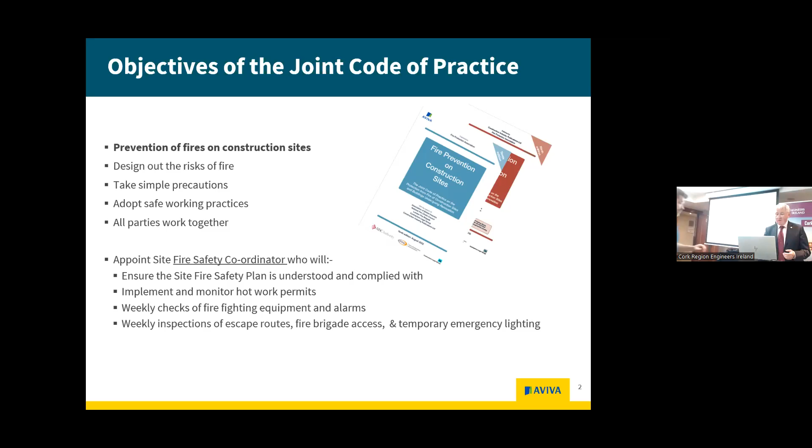Just a second, moving on. Let's see if I can do this right. Okay, straight away, I'm jumping now to section 5 of the joint code of practice. The first 4 sections are really just objectives and compliance and dealing with definitions - kind of the irrelevant stuff. So really, you're starting straight away into the meat of the code of practice.

The first part, we're looking at the requirement to work with project supervisors for the design stage and the construction stage, having a coordinator there. Look at the original plans and make sure that you design out the problems. You're going to be doing that on construction sites - looking at scheduling, looking at lifts, and bringing in machinery as a site is going on.

So really, it's important to get in early, try and eliminate the use of combustible materials. Basically, at the start, use non-combustible, non-flammable materials - trying to use rock wool or other materials instead of maybe polystyrene, or reducing your overall combustible levels. Making sure that they're maybe manufactured elsewhere rather than doing hot works on site. You can maybe prefabricate some of these things off-site, and that would all help in your scheduling.

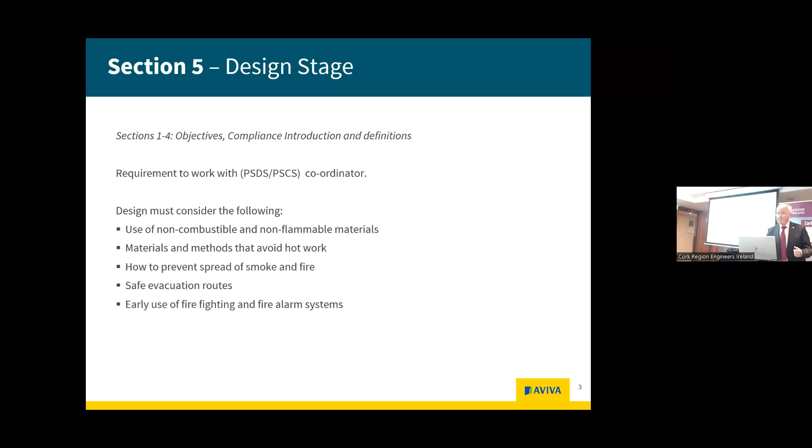So controlling the smoke will help reduce the spread of fire. And of course, having safe evacuation routes, getting people off site, that's a primary one. So maybe if you're up on a scaffold, is it only one access point or two access points? The code of practice actually looks at the regulations and says you should have two access points, so that if there's a fire starting where you are, you've got a second route to get out. Early use of firefighting and fire alarm systems is important - it's the first principles really of firefighting. If you've nothing to burn, and you get at it early, it makes it an awful lot easier.

Section 6, the construction phase. We're looking here at getting a good plan, and I can't emphasize enough, a good plan works with a drawing, laying out where on the site your skips are located, where the access routes for a fire brigade are, where cars are parked, where your set down is, where your lifts are, and things like that.

How frequent and where are the fire hydrants? Are you going to park over there, or are the fire hydrants going to be last or first? And groundworks - maybe you don't have water yet, so you might need a couple of tankers, just a tanker of water. During the summer, we probably need a tanker of water anyway to keep the dust down, but keep it full in the evening time in case there's a fire.

You won't always have access maybe to water during the early phases, but just having a tank of water would help. You might have a fire water tank, but you can get a fire water bladder, and that could have hydrant points there. It'll still hold maybe 50,000 litres of water, and it would help, especially if you have that conversation with the local fire officer - do they have to bring a fire tender, or a water tank, and where are their nearest resources.

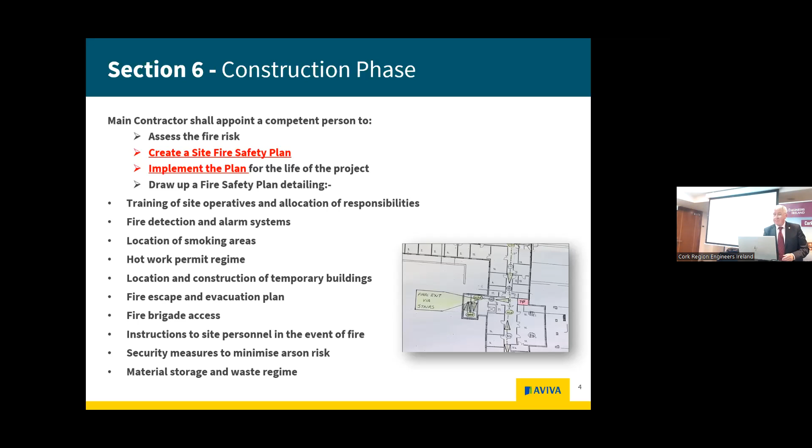Select a fire safety coordinator. You have a safety officer on site, hopefully, but does the safety officer have that skill set in doing hot works and management by walking about? Actually having a person responsible for safety, for fire, might be what the site needs.

So coordinating with them, there's the joint code of practice, now at revision 10, but revision 9 had a check sheet. Not an awful lot has changed, but it's a fantastic document to break down the day-to-day routines of going around the site, checking your fire extinguishers, are they serviced, checking fuel, where it's located, things like that.

But mostly it's hot works. You don't have to be a genius, just follow the hot works. That's where the majority of fires actually start.

Can we all think of really big fires in the last 10, 15 years, the ones that made the newspapers? Windsor Castle, that was construction work, they were doing renovations. And Beirut was a hot work permit issue that had massive consequences. So there's lots of things you have to look out for. Just follow it, you don't have to be a genius really.

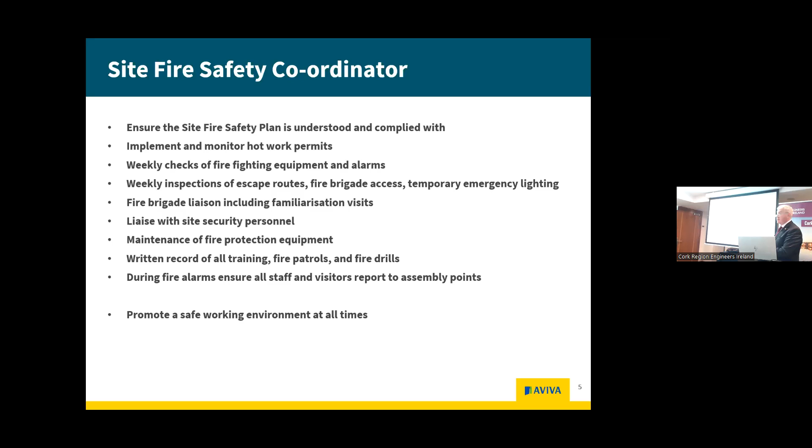Section 7 deals with the fire brigade. In the UK, they have an awful lot more full-time stations. In Ireland, you have 222 fire stations around the country, and fire is quite common. The majority of responses from a fire brigade, it's now becoming more car fires or car collisions, but still half their day-to-day work is actually dealing with fires.

So talk it over with the fire brigade, invite them to the site if you can, especially if it's a prestigious site, maybe like a new hospital. That would have implications for the nation if there was a fire and we're all dependent on it. Or it could be a pharmaceutical plant making lots of money for the country, or making vaccines for the world - these are all critical infrastructure.

So it's important to have the local chief fire officer coming out. Retained fire stations actually have to do weekly, maybe bi-weekly training sessions, so bring them to the site. Get them to see where's their nearest water, or if they had to do a rescue. The local crews need training, invite them to the site, get them to look at what issues they would have.

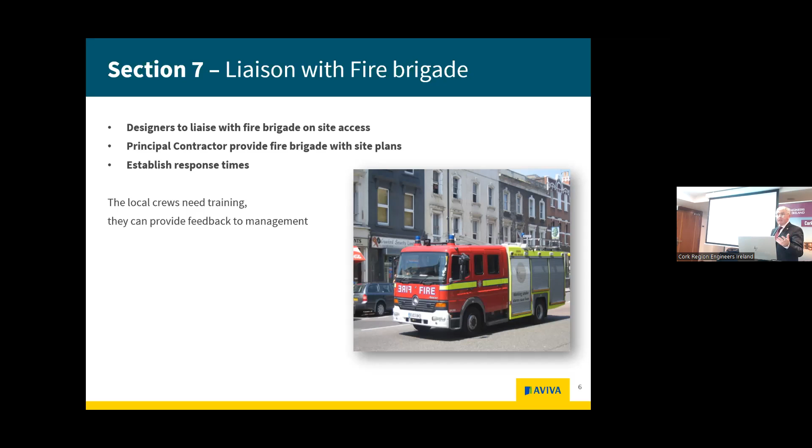But we're here in Rochestown Park. Our nearest fire station is in Anglesey Street in Cork, and there's a number of different routes of how you get here. So I did this on a particular morning - probably, and of course, this isn't looking at when the traffic is worst. So probably look at Google, and I just screenshotted it.

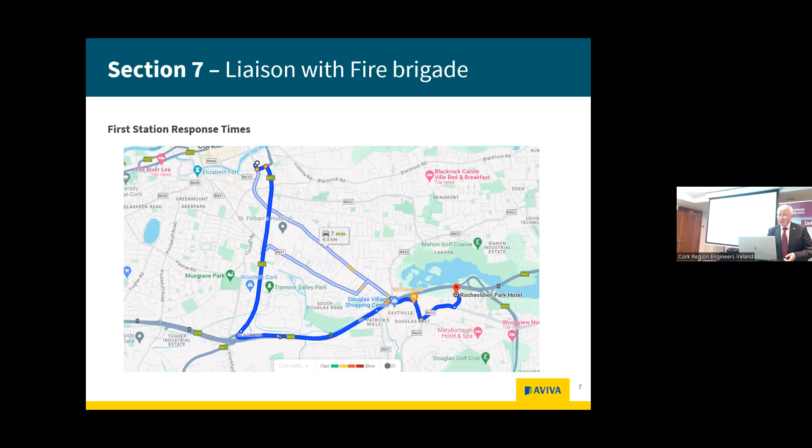Here we're looking at the longest journey actually being the fastest, or thereabouts. The shortest journey, which was 4.3 kilometers, was taking about 7 minutes. What I would have driven is about the same time, still about 7 minutes. That would be the route I would take, but there could be other congestions along the way if there's an event, so you might need to look at other resources that might need to come to the site.

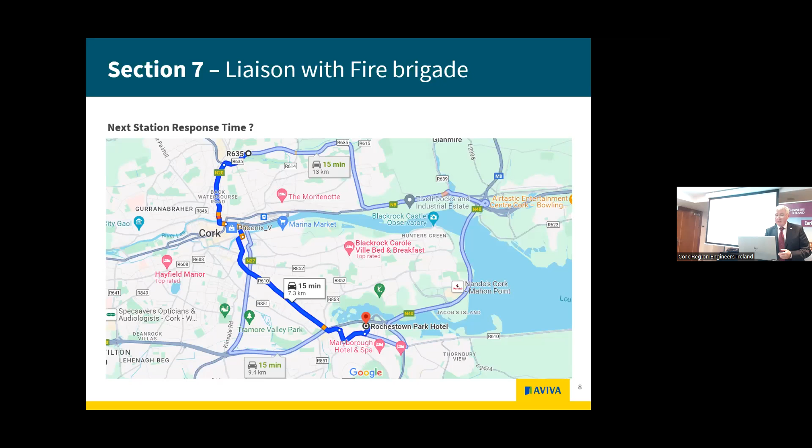Is that the nearest fire station, but is that the fastest one? Because there's another fire station for Cork here, which is Ballincollig, now full time.

It's nearly 13 kilometers, but you can do that in 12 minutes. So there's lots of things you need to look at, because you might be on a site where you need a hydraulic platform. But is that hydraulic platform based in Midleton or based in the city?

I don't expect there's going to be huge construction sites here in the hotel, but there's going to be other projects around. So you have to look at what your issues are, and have that simple conversation. When you request a fire brigade, have you got an Eircode? Most housing estates you're building or new buildings probably won't have an Eircode just yet, because that's the last thing. That probably won't have water just yet.

So there are lots of things. What won't it have? Probably won't have roads just yet. So these are all going to be challenges for emergency services. Now, I'm only looking at the fire brigade, but there might be other services you need, like the ambulance. So you have to integrate them all.

So go on to Google, literally do it, and put that in your fire plan, showing you've looked at it at the worst times. Then you'll realize it's taking 15 minutes for a brigade to get here before they start to walk the site. You'll have a good emergency evacuation, you'll be off the site in 3 or 4 minutes, and the place will be burning for 10.

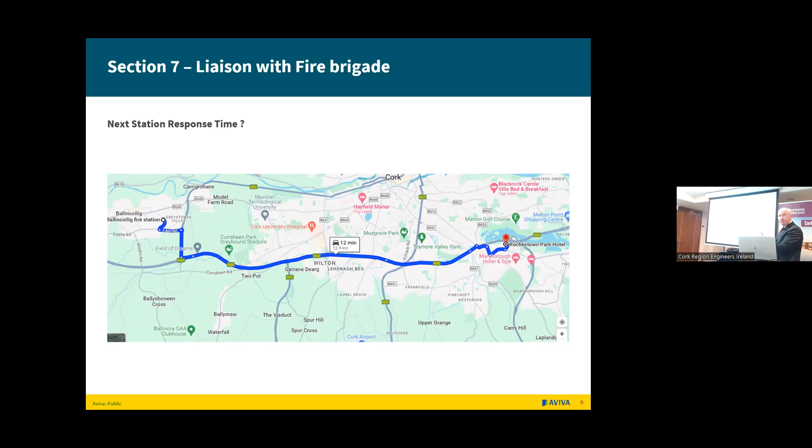So is that too long? Yes. So there's lots of ways you can actually minimize your fire stopping along the way, and we'll discuss that further in the presentation.

So establish a means of giving a fire warning. The regulations, the code of practice, actually looks at the regulations and says this is good practice, you should be doing it. Life safety is a critical element.

What we're looking at is putting up temporary systems. You can have emergency call points located throughout the site if it's big and wide. It all depends on what you're doing - are you renovating a building that might have polystyrene in it, or are you building a building with polystyrene? What are you looking at?

Display written emergency procedures, have clear access, and an awful lot of sites have site induction, but make sure they actually cover that. Where did you park? Where did you not park? Can it be easily understood by somebody that doesn't have English as their first language? Did you not know that I'm illiterate without my glasses?

There's lots of challenges that we all have, so it just has to be clear and quick. Clear signs, and knowing where your dry risers are, where you might have a wet riser, where your extinguishers are.

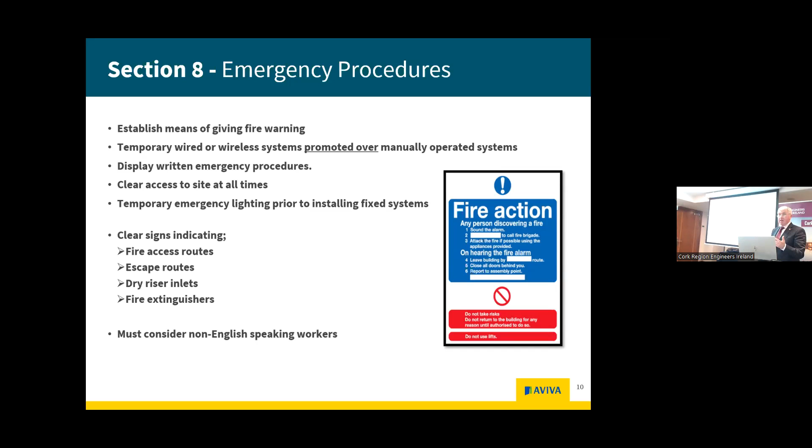We want early installation of fire stopping and passive fire protection measures. The door you came through is a passive fire measure - close it after. You'll be bringing out material so you might keep the door open, but at night time, for 16 hours of the day the building will be empty, from 6 in the evening until 7 or 8 in the morning. So there's a good 13-14 hours where there's nothing going on, so make sure you close doors as you go.

You're looking at having permanent fire escapes, early fire stopping in modular buildings rather than waiting long - put temporary stuff if you have to. Don't sign it off until all the services are there. But if you're going up multi-story buildings, you might need temporary fire stopping, put in every 10 floors, or maybe every 4 floors. You're trying to minimize your losses.

Firefighting shaft, lightning conductors, lightning - if you're building a distillery, maybe that's the first thing that should go up before you start to test any distilling operations, because you're going to have alcohol in the premises. You're probably going to be installing motors, electrical sensors, electrical equipment, air handling units - make sure your electrical lightning conductors are actually installed first, giving you protection.

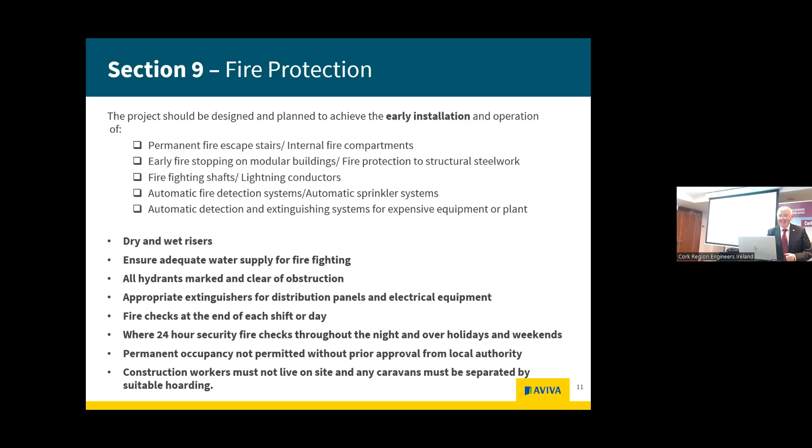So we're moving on now to section 10 about temporary covering materials.

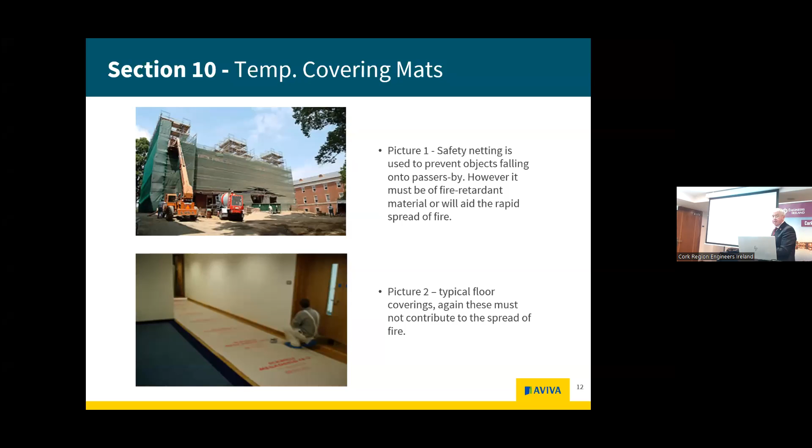This is the biggest source of fire problems, because all the walls, furniture, fittings, air handling units, new PCs or screens that you're trying to protect get covered with the cardboard boxes they came in. Cardboard is very flammable, produces a lot of heat, and is very hard to extinguish - water runs off the outside but the fire can still burn on the inside, so you have to apply a lot of water. Really, the whole idea is if there's nothing to burn, it can't burn. There will be problems with dust, but there are temporary covering materials you can put down that are not as combustible.

So there's lots of things you could do - probably start with closing the doors, having a hoover, doing more frequent cleaning, things like that. Those would be the things I'd be looking at as a surveyor.

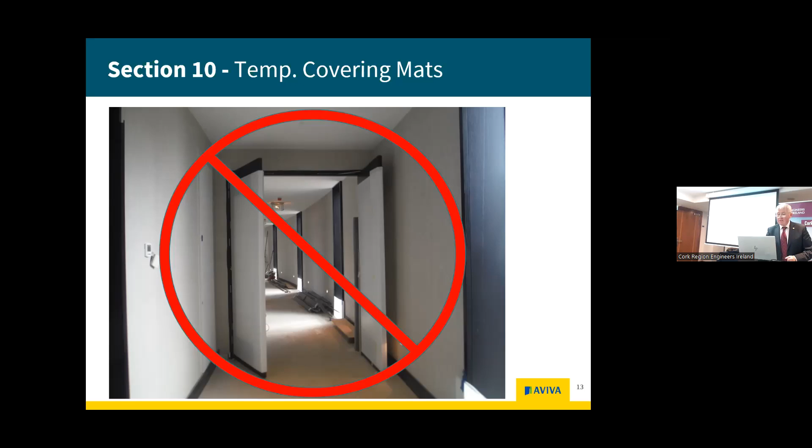So all of a sudden my concern is, was there any smoking on site? How close was the nearest hot work? If you still want to keep that covering, what other things can we do to try and minimize the risk?

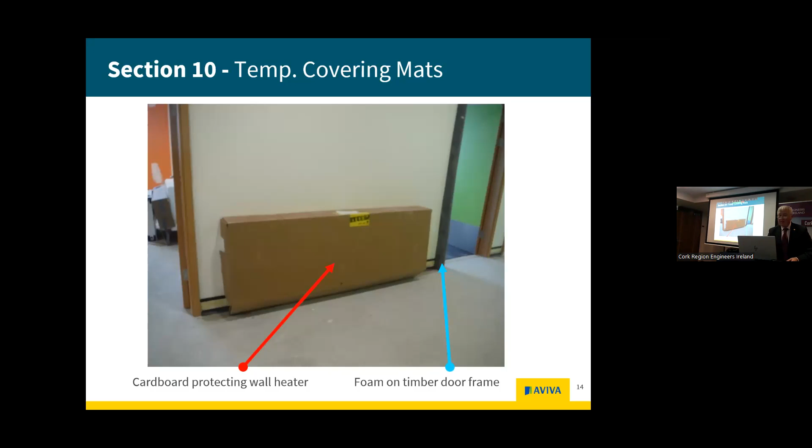And with portable extinguishers, you can't just say you have enough of them. If you deal with a small fire, you need to record it like an incident. You'll go to a site and see a pulled pin.

So is it an issue that the employees or workers on site are having a problem with management? Are they disgruntled, or are they likely to start a fire? Are they operating the break, the fire alarms, just to take a break? So having good relationships and good feet on the ground will be important for large sites.

So I'm a big advocate of MBWA - management by walking about. Get your permits, do your walking, get people and walk, smell and look and have the conversations and see what you see.

Extinguishers should be located in a conspicuous position - not that you want to trip over them, but they should be on every floor, as you're going into the floor, normally along your exit routes. So in this room we've got a call point at the door - they're not located over on my side, but everybody's going out that way, so the first thing you do is hit the break glass and head on. That's where your extinguishers should be located, close to those points as you're going out.

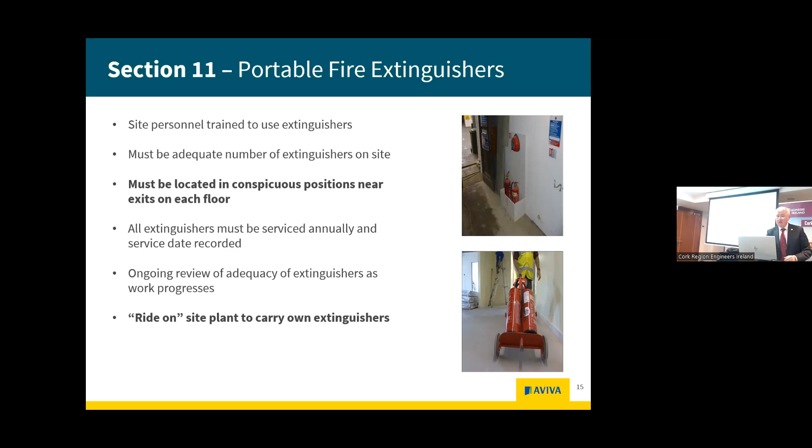We move on now to security. This is really about helping with theft of items. Materials prices went through the roof since the pandemic - not quite through the roof, but up about 50%. There were an awful lot of projects being scheduled around the delivery of things like rockwool.

Scaffolding boards were expensive, and people would steal them. Apart from timber pallets and things like that being hard to get, when dropping off materials you'd have to ask, can I have the pallet back, please?

There are other things to look at too - security looks at all the perimeter fencing, making sure somebody is aware of what's going on so you don't have any losses. You could have a physical presence at the entrance where employees sign in and sign out.

The middle creature here, like a Dalek, is actually a standalone sentry with electrical sensors and emergency lights, so it'll start flashing if it detects motion. It has live feedback to a monitoring station that tells intruders, security is watching you, get out of here - an actual online presence.

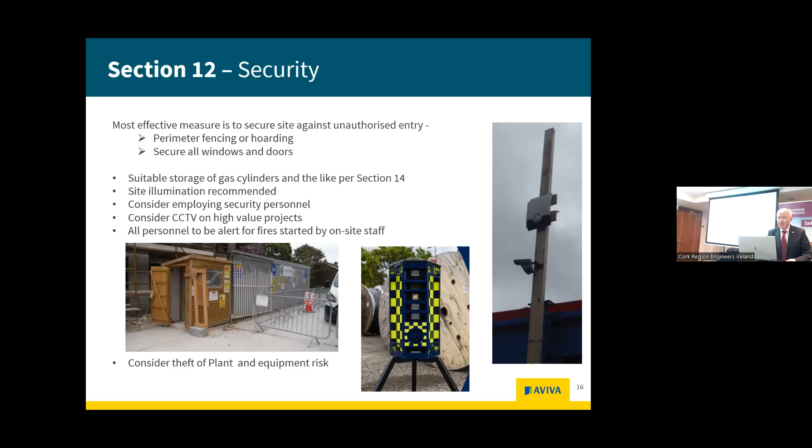Moving on, section 13 looks at temporary offices. We all have temporary offices, so making sure your fire and set down plan is right. The very first thing about fire prevention is, where are these going to be located? You're going to need power, and you don't want to be changing the location of these regularly as the project progresses.

One set down area where we can all work - that's common, so you want it close to the site but not too close. There are standards about how close you can go, but it's risk management to a certain extent. If you're under the building and don't have a footprint, you might need to assemble a lot of materials off-site and handball them in, or crane them in.

You know, where you're assembling them with nuts and bolts rather than welding them on site. But like the offices themselves, this is now nearly temporary accommodation, so you have to make sure that that has a fire detection system that covers the office above as well as the one that you're in, because the good thing is, don't store anything above it or below it.

So the old sites, plenty of space, I'll throw a couple of insulation or some fuel tanks or cans or something like that in under there to be sheltered. But all you're really doing is creating a lot of combustible materials around it. But from a life safety perspective is what you should be looking at there as well. You don't want the smoke from that fire to be contaminating your site, especially if you're building clean rooms.

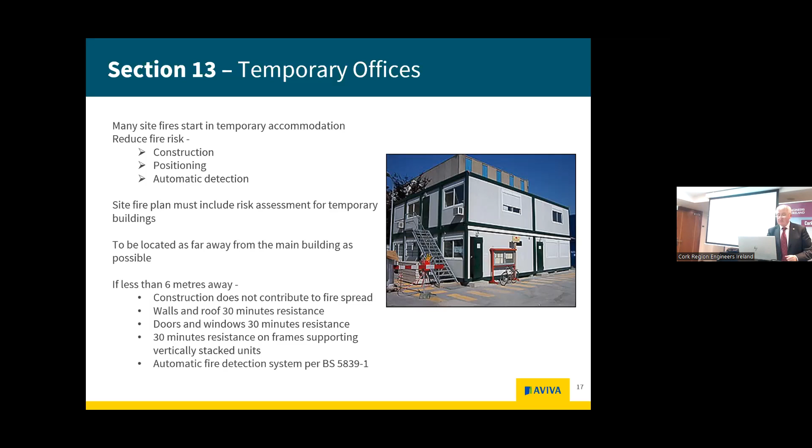So it's important to make sure that the fire detection system covers all the floors. So you're going to have to put that into your temporary offices. Looking at flammable liquids and gases and things like that. It's not rocket science, but it really is, if it looks combustible and it's red or something like that.

It's not just hot works, it's what you're doing with your materials. And all you want is just the materials that you're working with. Everything else, get it offsite.

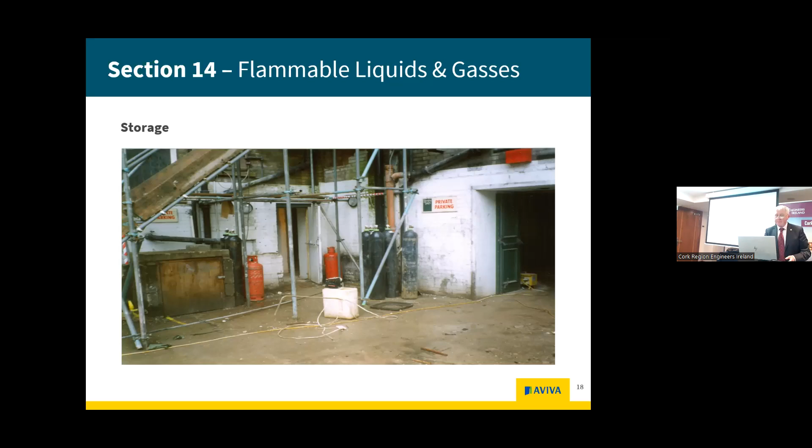Again, what I'm saying about hot works, you have to look at things like electric arc welding. We've got a lovely sign here in the middle, no smoking, no naked lights, things like that. But for somebody who doesn't have English as their first language, is that going to be a challenge? What does a naked light mean to somebody who doesn't have English as their first language? So literally look at pictograms is what I'd be recommending.

Explosion of acetylene cylinders. Now there's a whole section about acetylene. So why are we concerned about acetylene? The safe distance that you must have, if you've got an acetylene fire, is about 200 meters in radius.

So draw 200 meters from this room, and we're stopping access to the main road, where you might be evacuating a school, and then all of a sudden, is that going to affect commuting? Is that going to cost you? It might all fall on the construction project if there's an incident.

They don't stop these acetylene fires within 5 minutes, unless of course it explodes. But otherwise, they could be throwing water on the acetylene fire for maybe 24 or 36 hours, just to keep it cool.

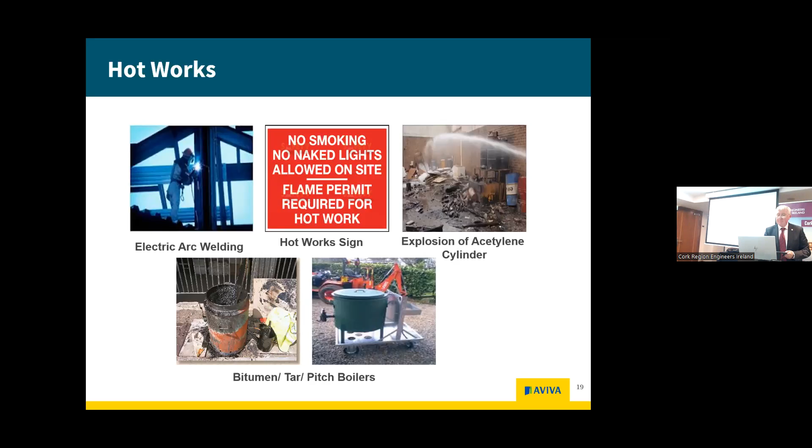And again, we're on flammable liquids and things like that. Make sure it's securely fenced, shaded from the sun, bunded, things like that. The obvious things about reducing your heat exposure and things like that.

Store no more than a day's supply. Everybody wants to bring in stuff for a week. It means you're going to have to bring only what you need for the day and take the rest of it off site. If you can't, you might need to create a particular area within the site that is clearly identified on your site drawings. But of course, your site changes every week, so guess what? You're going to have to update your site drawings.

So there's lots of guidance really about the storage of flammable liquids, making sure that there's adequate signs and include that in your site induction.

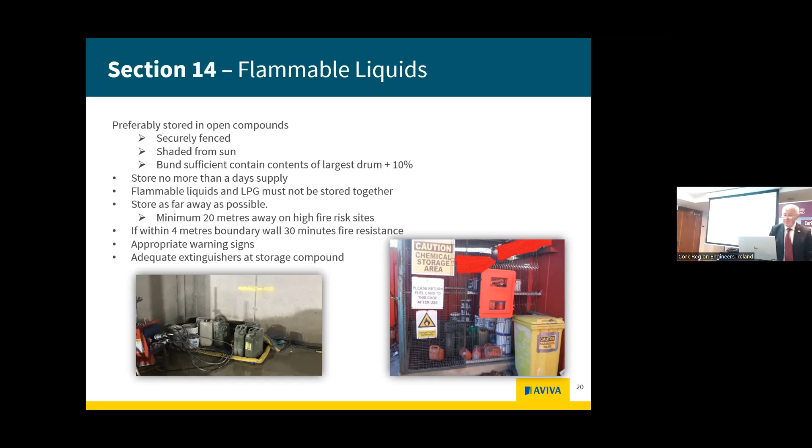Again, what I said there about acetylene, it's unstable in a fire. Unstable is explosive, is the word. So the fire brigade should establish a 200-meter exclusion zone. And they actually probably use a thermal imaging camera to see where's the heat. If it's breaking down, they're going to be well behind the 200 meters. And you're looking at a long exposure, things like that.

The specifics, there's links there on the handouts. If you get them on soft copy, you'll be able to link there to the fire safety standards. This is the Irish guidance in relation to acetylene. And then there's other links about acetylene and transportation failures and things like that.

So literally, carry acetylene cylinders vertically. You don't leave them lying down when you're transporting them. It's a liquid in a mesh and things like that. So if it's lying down, you have to leave it. If you have it rolling around in the back of your van or whatever, if you bring it to a site, it should be standing for at least half an hour before you can start to use it.

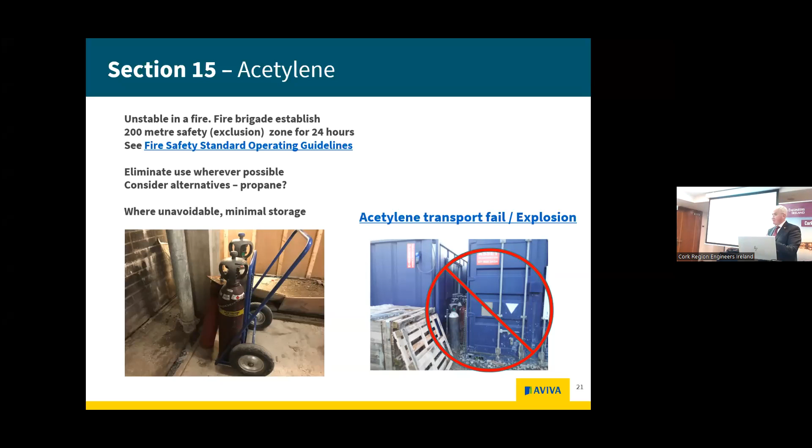And of course, look at where you're storing it. Make sure acetylene is stored separately from oxygen. You don't bring all your goods to the one basket to make it really interesting.

And hot works is a key part of it. Making sure you have a permit, making sure it's only for the day, specific for the task. So issuing a hot work permit for a week is ridiculous. That's not going to work. It's only just a paper exercise at that stage. So you're going to have to ask: what are you doing? Why are you using it? How can you control it?

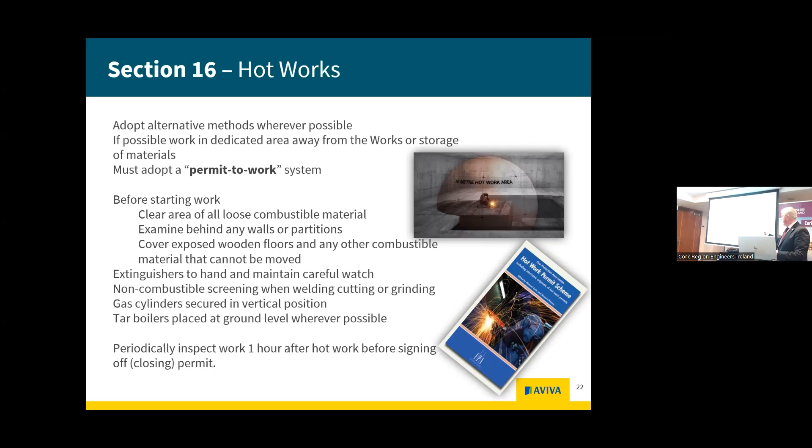And maybe using something like your thermal imaging camera might actually reduce your fire watch afterwards. You might be able to clear the fire watch. You can take a digital photograph of the temperature, and if it's shown to be back to normal, then you can probably terminate it, you know. So there's very good separate guidance on hot works, things like that. But have a look at it, on that next slide.

Electricity and gas don't have to be about a third of all fires are caused by electricity. That's where all the power is coming from. Now, this is before we start to go electrified on construction sites, where you've got EV cars. You might get EV plant that might need electrical power and things like that. So these are going to need more attention. What else are we going to be talking about those?

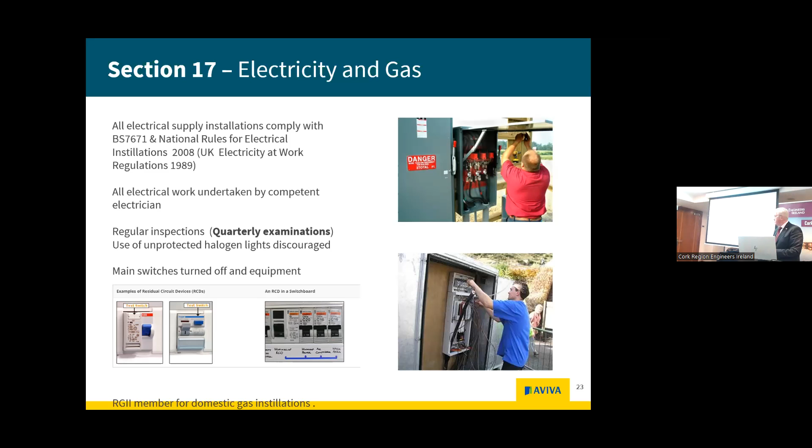Gas. On this particular site, I was kind of thinking, well, gas is still a risk. So this is a multiple choice question, and call the safety officer over. I'll give you three questions. Is it a live gas main that we're looking at? Just in case you didn't recognize the big yellow pipe. Right? The big yellow pipe is interesting. So I asked the question: was it a live gas main? Or was it a no-gas main pipe that had been isolated? Or are you unsure, you don't know? And the answer I got, which was probably the worst of them all, was I don't know.

At least, things like that. But look at the machinery - is the machinery too big for the job? Maybe a smaller machine, maybe it should be really hand done.

So this is why I'm a big advocate of MBWA - get out, walk around, have a look. That pipe wasn't feeding just this site that we were in. That was feeding maybe half Dublin.

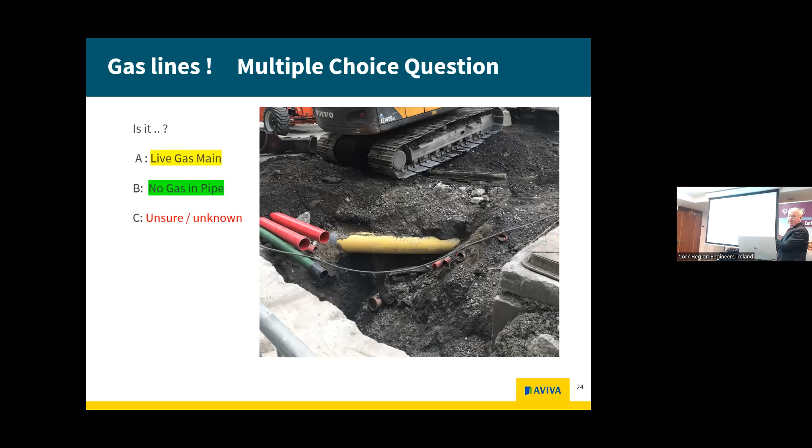So know where these are, know what your excavations are. That is surely part of fire risk management on the site. You'll make the evening news anyway if that goes off.

And looking at your waste is critical. It usually contains cardboard, and we're all into recycling - that's important, so you've got to segregate your waste on good sites. You've got metal, and you've got rubble, and then you've got maybe timber and other recyclables.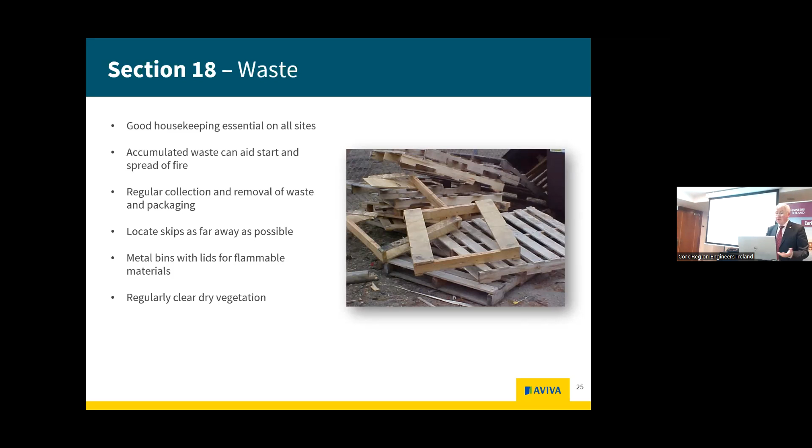But really, just looking at it, you reduce your bins where they're located. Have more frequent collections, so you've less to combust. It reduces your fires, the amount of fire, how big it can get.

What do I need to say about housekeeping here? But these are projects that are due to open in a couple of weeks. Now the floor was covered in a sheet of timber - that kind of a light temporary sheet of timber that's probably less combustible, but you start off with getting hoovers, getting somebody paid to clean up, you know.

But really, you've got the workers there, they get paid to do this job. Don't leave a mess for another person. So that's really where good supervision just says stop now and fix it up, rather than rushing to finish the job.

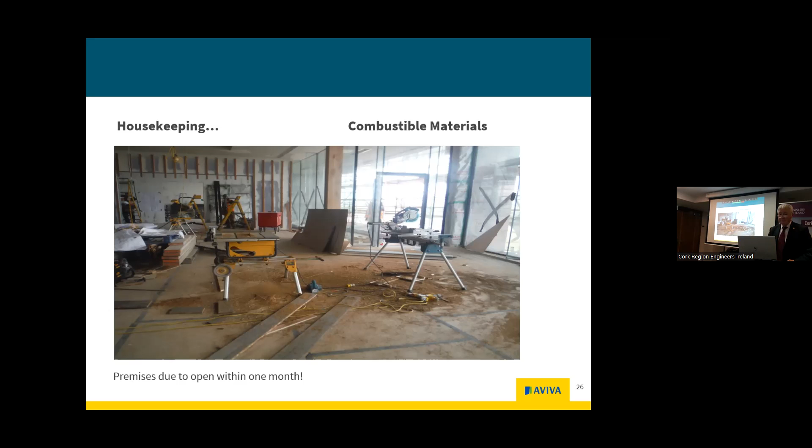Plant vehicles - now earlier on we said all mobile plant should have extinguishers on them, things like that. But you have to look at the stationary plant powered by internal combustion engines, so those are kind of generators or compressors and things like that you'd have on site. So refuel only in a designated area, and do not fill fuel tanks while the engine is running, because you've got hot exhaust and you'll spill stuff and things like that.

So compressors should be housed separately. You're all about - you don't want people to steal the plant, the generators. Maybe there's winter coming and a temporary portable generator might be very interesting. So there's lots of security things that you can do about a site.

You even have, let's say, one of these on the very bottom there - you've got these large vehicles for moving out. How much are they? 150,000. A lot of money. The tires themselves could be what might be the interesting part that you want, and things like that. But really, if one had a fire, you don't need to take the whole lot of them - just push them apart at night time, so there's a good 10 meters between them. Look, if you don't have the space, then don't put them all together.

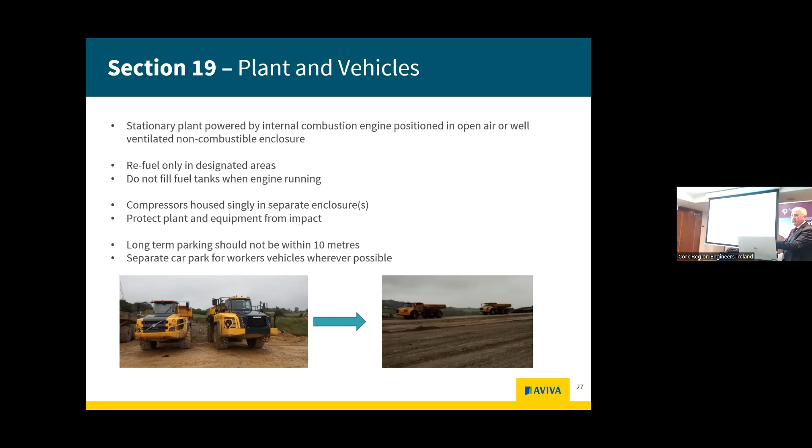These are just examples of generators and things like that. One on my right had a drip tray - it was all good.

The other one on my left here, and that was underneath a scaffold, tower scaffold, to get out of an excavation - and all I could get was the fumes as I was going down the basement. In the middle of winter, maybe 6 or 7 in the morning, there's no air movement at all around the middle of the city. So these generators just pumping exhaust right up on our escape route, in and out, things like that. So it's probably a case of let's actually duct it up, take it out.

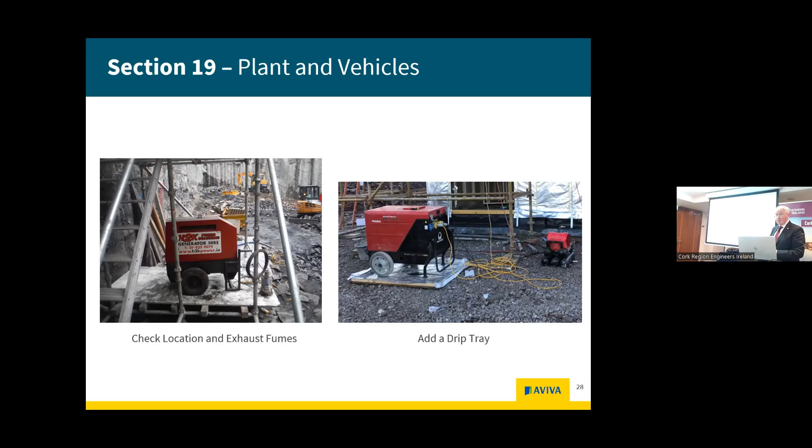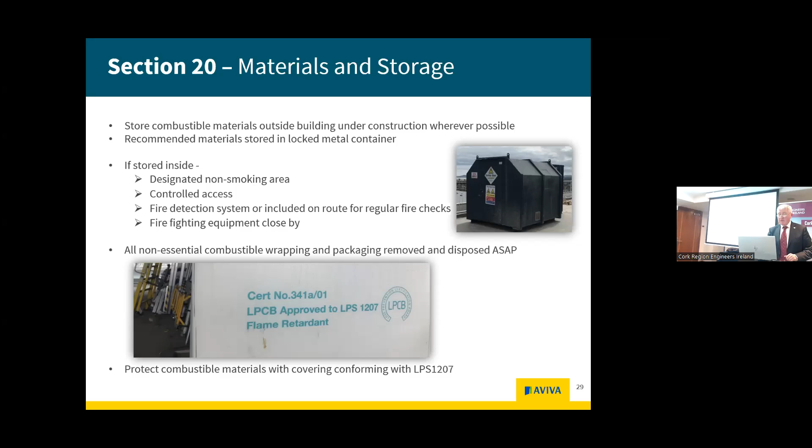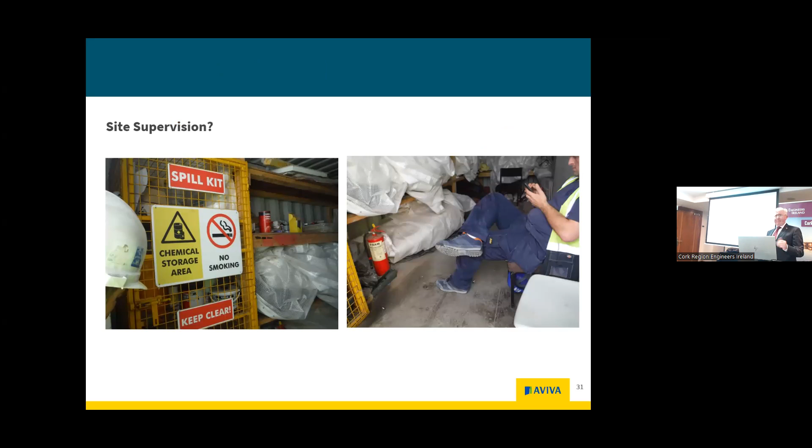Having a no smoking policy on site will be critical. I'll quickly go through some of these - and I'm serious - these are on sites where you have all the safety signs and the fuels, and somebody beside it is probably not smoking, but there was evidence of smoking beside them. So you don't have to be a genius to see the risk.

High-rise construction is probably going to be another challenge. We don't normally have it here in Cork, but this is the plan for the docks here - they're looking at 20 or 30 stories. Big story there for anybody, apart from having a flood zone area to work in. This is what's planned for Ireland - we're probably going to have to go that way to reduce our footprint and make it economical for the site. But we are getting these projects now, they're not pie in the sky anymore. So this code of practice will actually help you there.

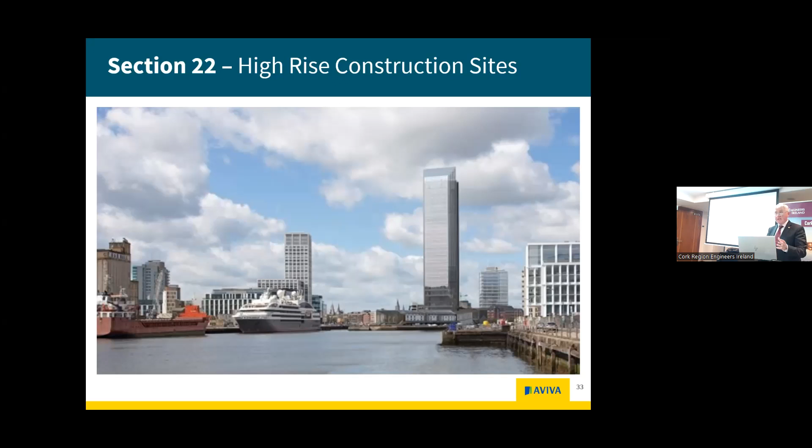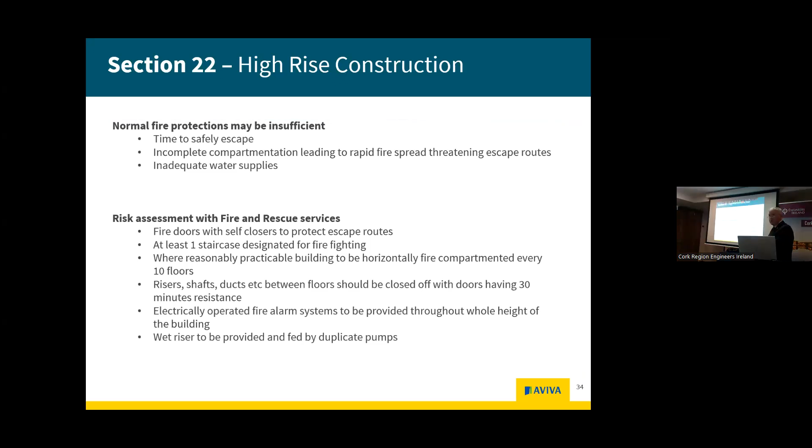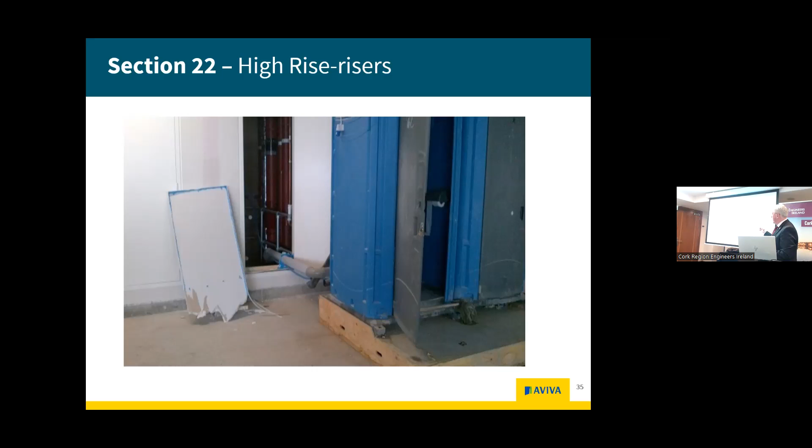With high-rise construction, you're looking at horizontal fire stopping as you're building up, putting in temporary measures so you don't lose the whole lot. Having your escape routes and timely escape, with incomplete compartmentation - literally build a temporary wall. It doesn't have to be pretty, but that in itself will help with security going through the site, and it'll also help with fire suppression. You might have all these temporary fire structures, but then somebody needs to go to the loo and they just blow a hole in your fire stopping through a wall.

Timber framed houses or apartments - there was a video on this, and it was just pure ashes after the first alarm. Within 15 minutes it was gone. All you had was the metal frame of the scaffolding afterwards, identifying it. And we looked at the emergency event timeline - the time it took for the fire brigade to get there, it's already gone at that stage. So that's why insurers don't particularly like composite or insulated formwork, things made of polystyrene, or timber frame.

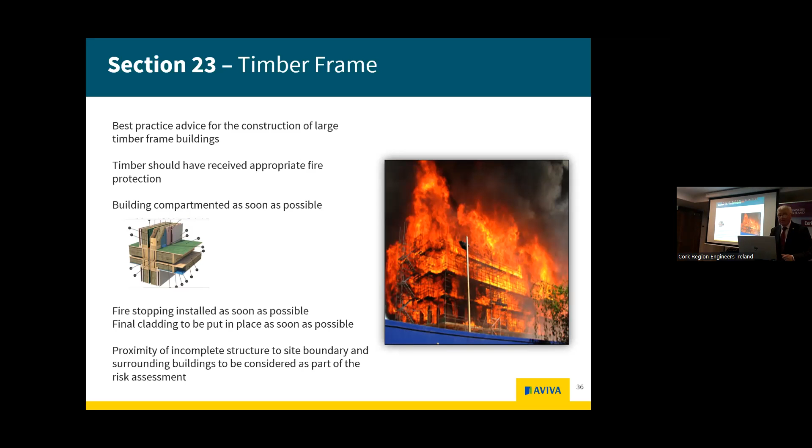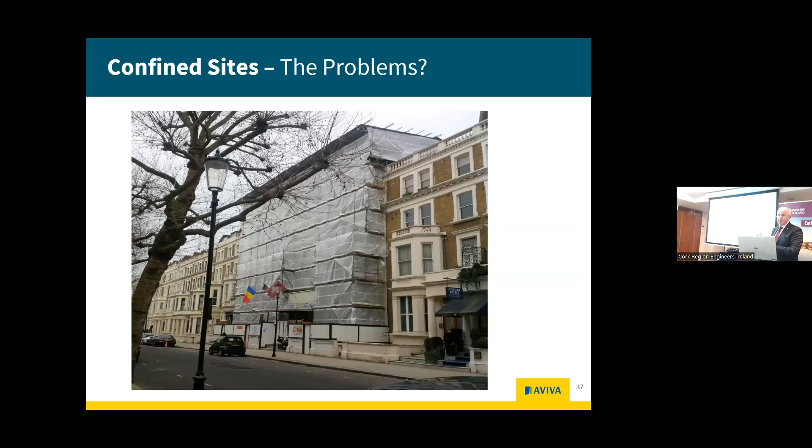So let's go back to the very start of the document, which was about selecting stuff that doesn't burn or minimizing it. These are all good practice guidance. You could have temporary sheeting on the outside, and that sheeting itself could catch fire because it's plastic. So there are lots of materials you can actually get which are safer options.

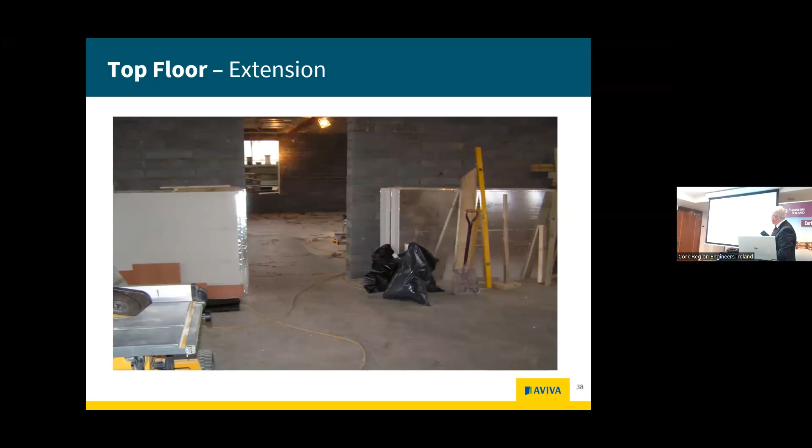Having good housekeeping, or as best as you can. So this might be just a top floor extension, but where's all the combustible materials? They were up on the roof, all timbers. Do we need to have it all there? Only have a minimum amount.

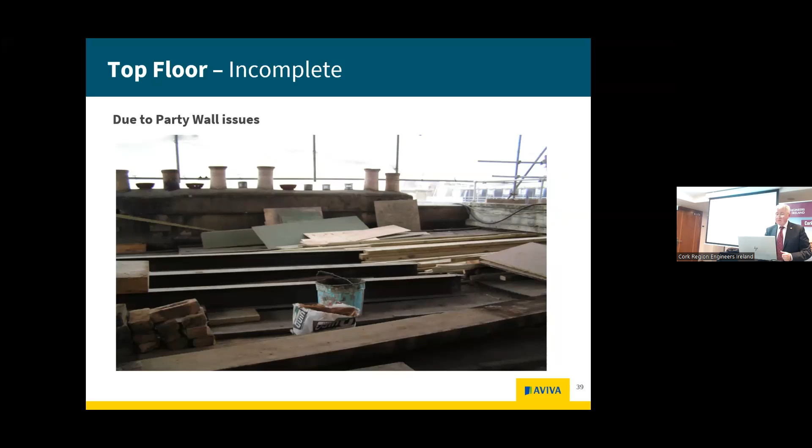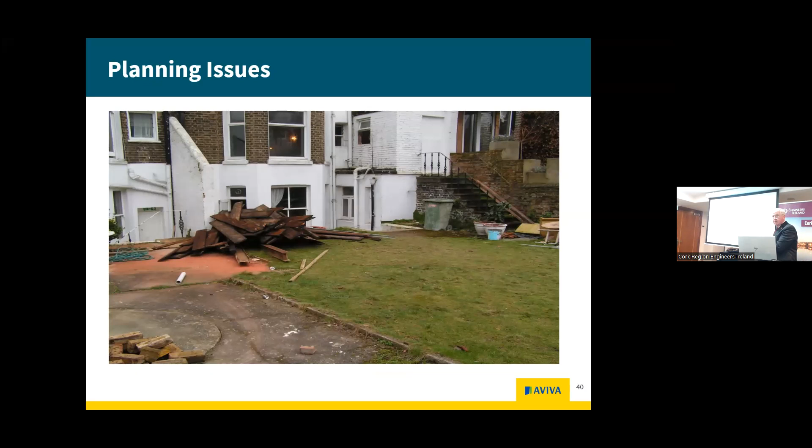So scheduling is important. But you mightn't be able to dispose of all your timber floors because they're part of the listed structure. So why are you going to store it right next to your building? Could you store it at the end of the yard instead, away from exactly where you need it?

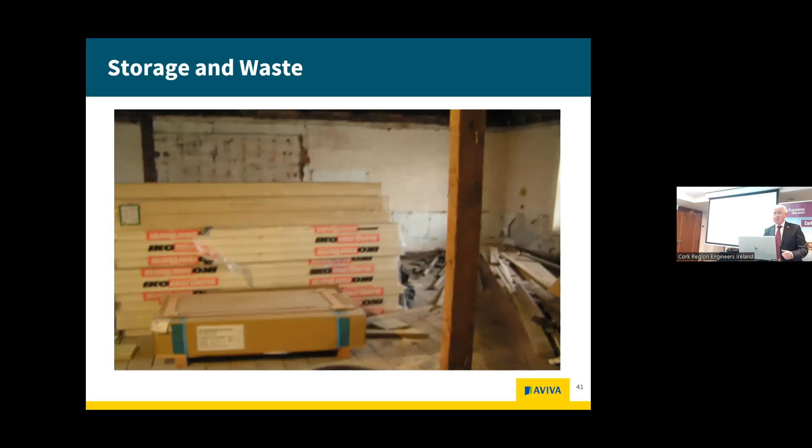Your insulation - is it combustible? Maybe something like Green Guard, which is extruded polystyrene - just watch where you're locating it. Only use the minimum amount, or not use it at all. Is there any substitute you could use? Surely, how long did it take you to collect all that waste? Maybe it's time to actually ship it out.

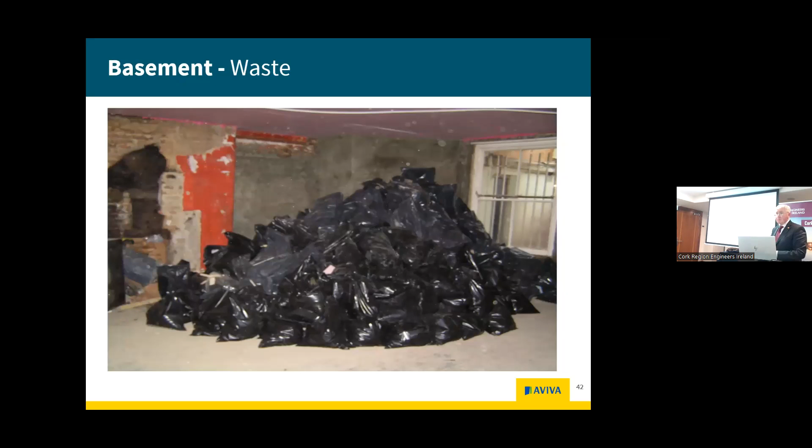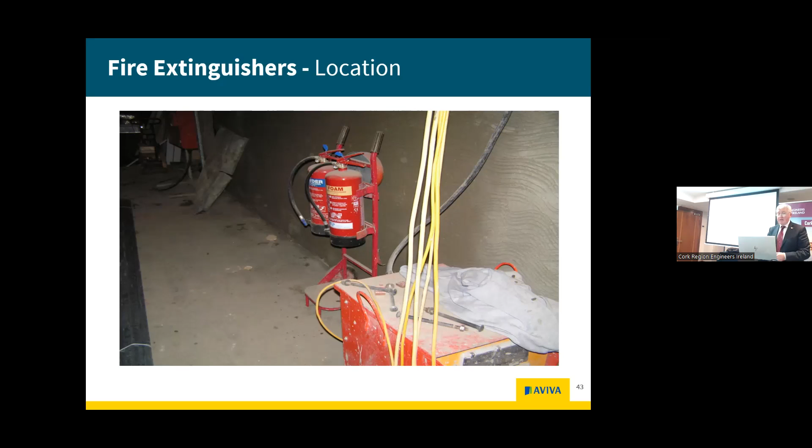Having extinguishers is good, and this particular temporary fire station fire alarm had actually a manual call bell at the back. Again, the extinguishers are gone, so this is part of management by walking about. And what I'm saying here is ride-on plants should have one too.

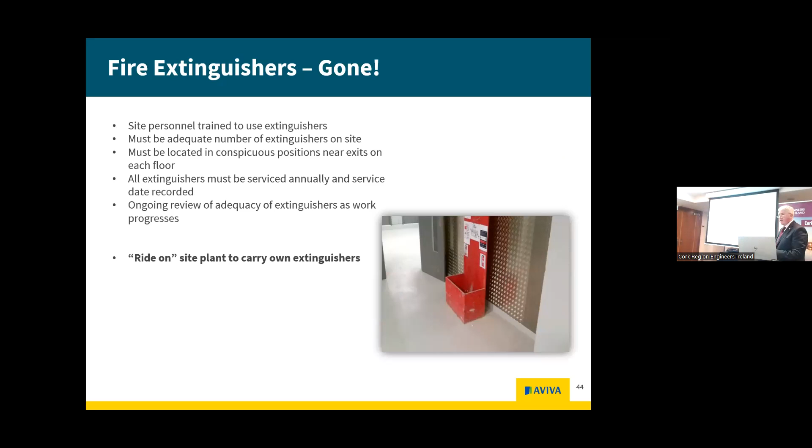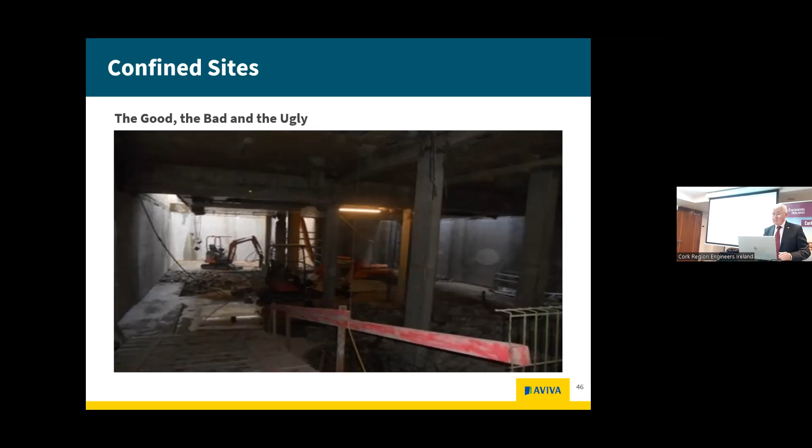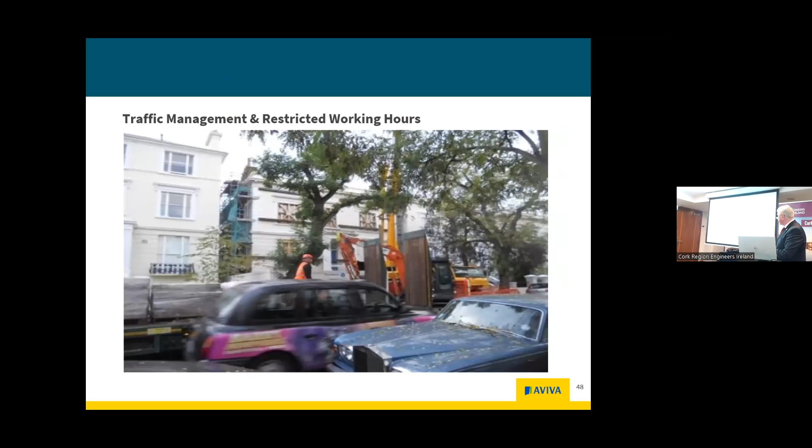Temporary accommodation - people will actually be living on site in some cases because it might be remote, difficult to get to, or cheaper. So you're going to have to deal with all those challenges: access for plant if there was a fire down the basement, it might even be flooding. These are all challenges you would have - access in and out, fighting fires and things like that. You might have traffic management and delivery scheduling, because maybe there's schools or hospitals close by, or maybe you can't work on a Saturday or before 7 in the morning. You might also need to keep all the trees and shrubbery. What we'd like to see is something clean and tidy.

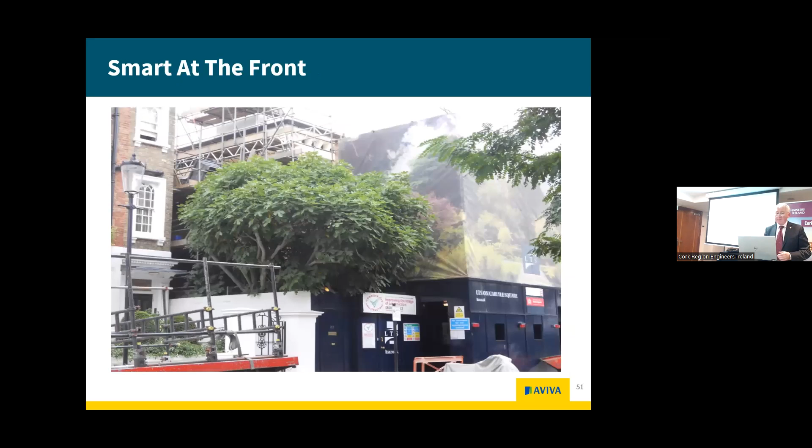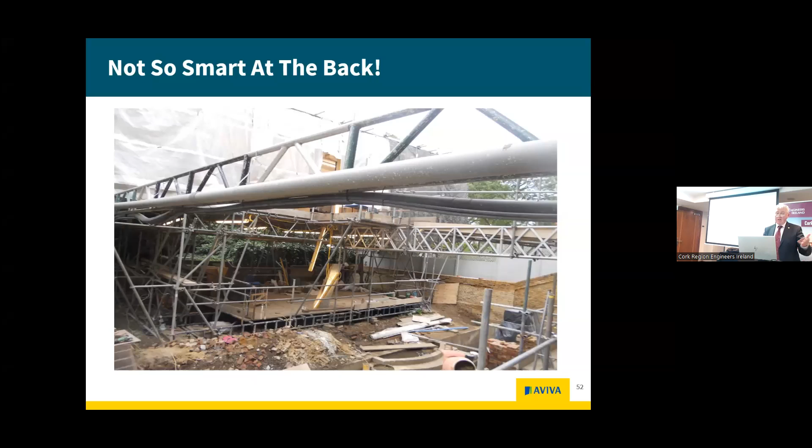So look, it could be smart at the front and a totally different challenge at the back. These are the things - there could be basements, there could be other structures. I'm not saying clean and tidy, but if there's nothing to burn, hey, we're not too bad.

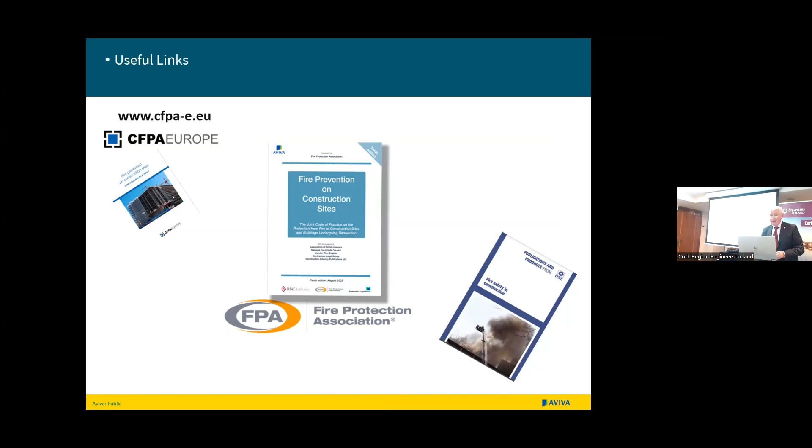That's me. Any questions? Perfect. Is there any questions from the floor? Just I can start online maybe, and we can go from there. Or is there someone from the floor that wants to start?

I was going to ask about fire plans on construction sites - 3 months, is there any mention of that? Checking every 3 months and a review every 3 months. If the site is changing, it might need more frequent checking. So let's say if you're building housing or something that's moving and progressing down the road, literally the risks will be changing. It might be a new road construction, or something else that you've started here and moving around. So it depends on what the project is, but as more expensive materials come in, that's a good time to be looking at them. Probably know what's combustible as things change - again, walk about, have a look.

Online there: what form of insurance policy covers fire on a construction site? Contractors all-risk. You need to talk to your insurance broker on that one - I'm going to plead the fifth on that one. Yeah, talk to your insurance broker. Yeah, that's okay.

How do you deal with the age-old problem of latex gloves covering smoke detectors? That needs discipline - the person who applied it needs to be probably disciplined and given a red card. But that's really hot works - are you going to mask the sensor? You still might need temporary cover for it, because I see an awful lot of sites - how else can you do it? So you might need to mask it, but if it's well documented, I don't mind what way it's done, provided it's removed after your hot work. That's where literally you check your document, things like that.